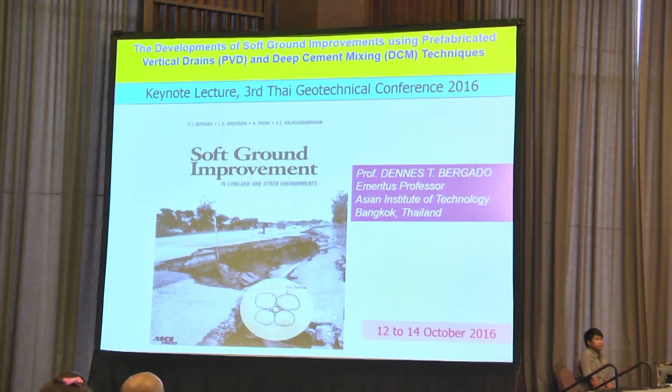And ever since I published my book in ASCE, Soft Ground Improvement, it's from my teaching notes and from the help of my graduate students. So we are actually lucky for AIT to be in the central plain of Thailand, where you have soft Bangkok clay.

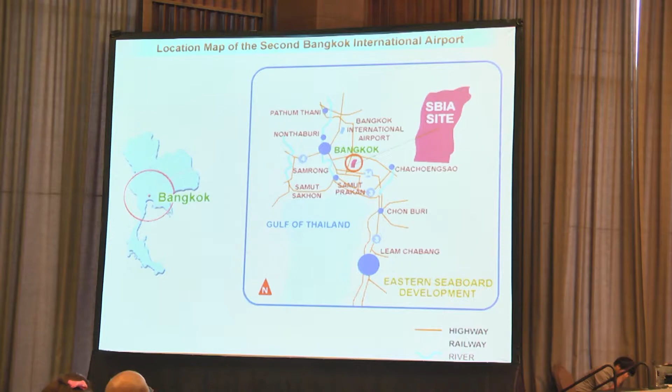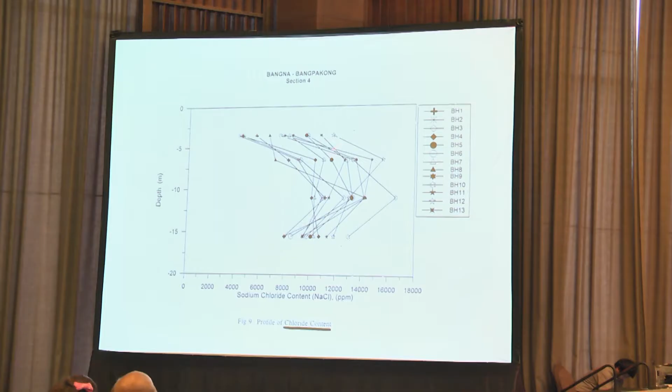And during the development of Suvarnabhumi Airport and expressways here, luckily they use soft ground improvement, which is more economical. And if you look at the soft Bangkok clay, it's quite normal, with water contents around 100, and undrained shear strength around 1 ton per square meter, or 10 kPa, and salt content, which is normal here, is not abnormal, and the organic content is also normal, about 4 to 5%.

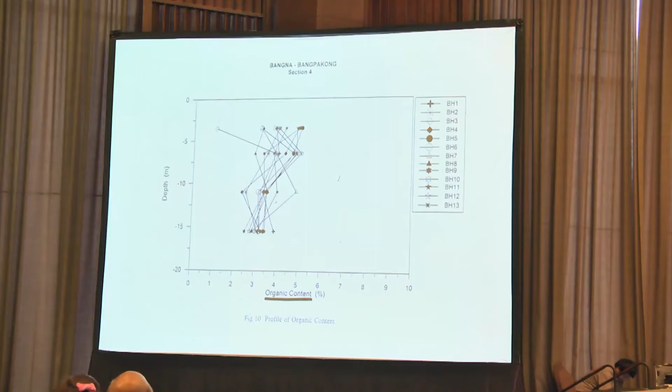This is good for the deep mixing method with cement. Our first project for the PVD was the Cobra Swamp, Nong Ngu Hao, and at that time it was just fish ponds, and bulldozers had problems leveling the ground, except when it is dry in the summertime. And what is the beauty of the soft Bangkok clay is that it's quite uniform.

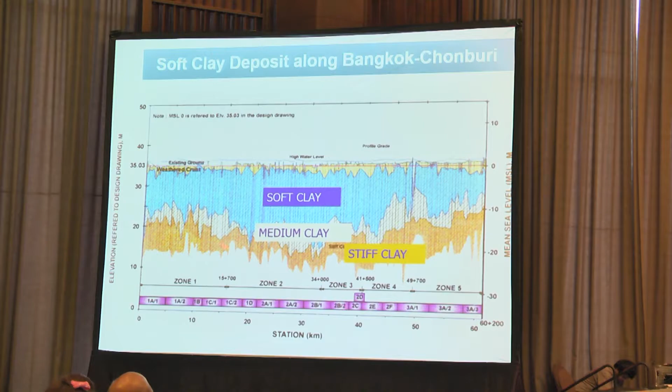You compare it with other clays, like in Vietnam, there's a lot of lenses of sand and silt, but this one is quite uniform, solid, soft clay, about 10 to 20 meters thick, continuous north-south and east-west, for 200 by 400 kilometers, a big deposit. And down below is the stiff clay, the medium clay, and the dense sand.

So to improve the soft clay, because there's a lot of voids, and these voids are occupied by water, we have to take out the water, because water is the enemy of the clay. If there's less water it's stronger, more water it's weaker, but the permeability is very small. So the objective is to reduce the voids.

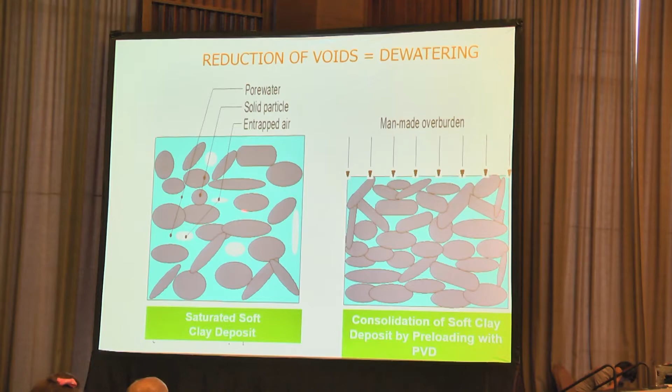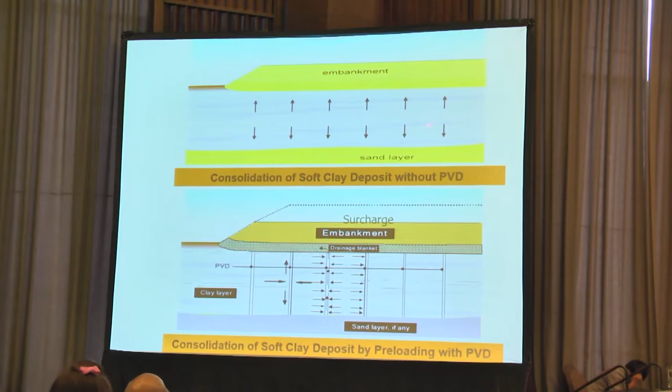From here, higher voids, to here, lower voids, you pre-compress. But you have to use some artificial drainage so that consolidation, which is normally vertical, takes time because permeability is very slow. So we have to put in artificial drainage, which is the prefabricated vertical drain. So what is PVD? It is artificial vertical drainage. The purpose is to shorten the drainage path so that consolidation will be faster.

And in order to squeeze out the pore water from the clay, you need a surcharge. Water will not flow up against gravity, it has to have a hydraulic gradient so that it will flow up. And we use horizontal drainage between vertical drains, which is higher than the vertical permeability, because of the sedimentation of the clay, horizontal permeability is higher than the vertical.

So we use that one. Then the vertical drain will take care of the vertical drainage, that's why it's called vertical drain. So surcharge embankment usually uses soil embankment.

However, they say, oh, this one takes time, about 1 year. No, time is money, you want faster than this. So now vacuum pressure is used to make it faster, you suck the water out, connect it to the vertical drain. And the latest one, before I retired, we found that applying heat combined with PVD, called thermo-PVD, is quite promising. So if you use vacuum, maybe you reduce time by 30 to 50%, but if you add heat, you will decrease it further.

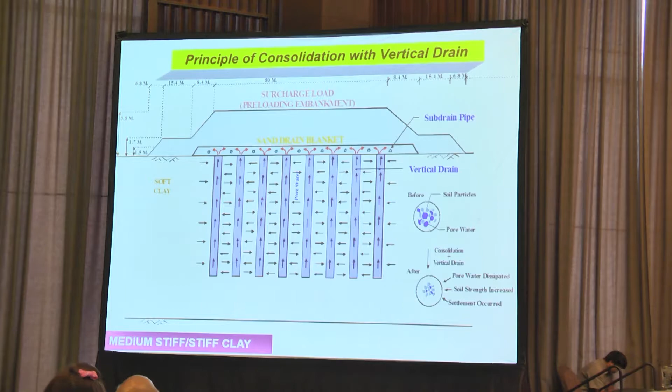So the principle is: you have the original ground, you put in the drain, put surcharge until it settles and compresses, or pre-compresses, then take out the extra surcharge. So step 1 is here, step 2, then step 3 here - you pre-compress already, compression. Then when you take out the excess surcharge, you have a rebound a little bit.

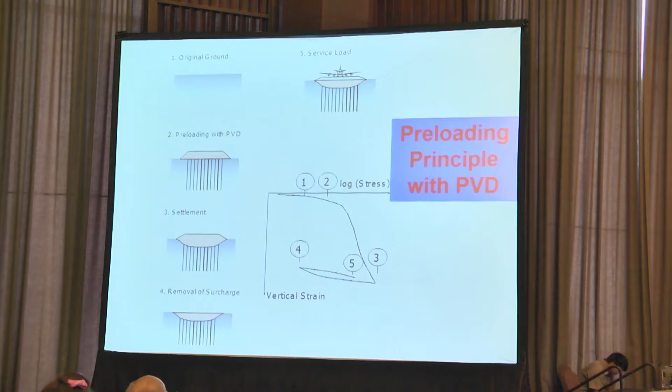When you use it for a runway or road, you remove compression - primary compression consolidation must be complete. The remaining part is only secondary compression.

If you don't use vertical drain, it might take a long time for compression - consolidation can take a very long time. But if you have vertical drain, you might finish in a year. Or if you have vacuum, less than that. And if you have heat, even less time.

But since you are building an embankment on soft ground, you have to have stage loading here, and that takes time. This one alone takes almost 6 months, another 6 months - so a year is already wasted if you don't use other methods.

These PVDs come from the original sand drains. However, for sand drains, sand is expensive here - the source is 100 kilometers away. The diameter is quite large, and the smear zone is twice the diameter. Imagine the smear zone here - I will show you later what's the problem.

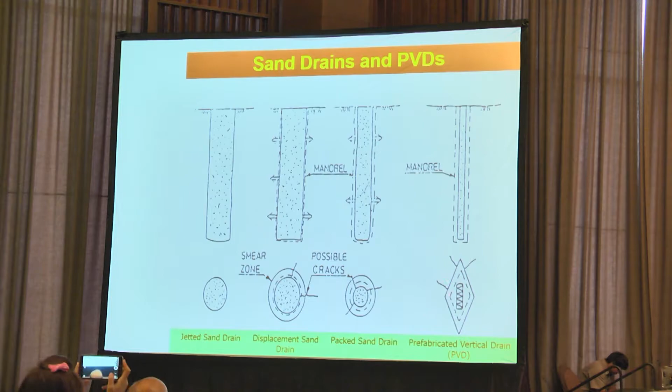But for PVD, it's just a very small cross section - the mandrel is also small cross section. So this is the PVD. It's made of polymer, geosynthetics.

It has a filter around the core. The filter allows water but prevents or minimizes soil particles from going into the channel of flow, which is the function of the core. The core is the channel of flow, prevents buckling, supports the filter. The filter allows pore water, minimizes fine particles, and reacts against horizontal pressures.

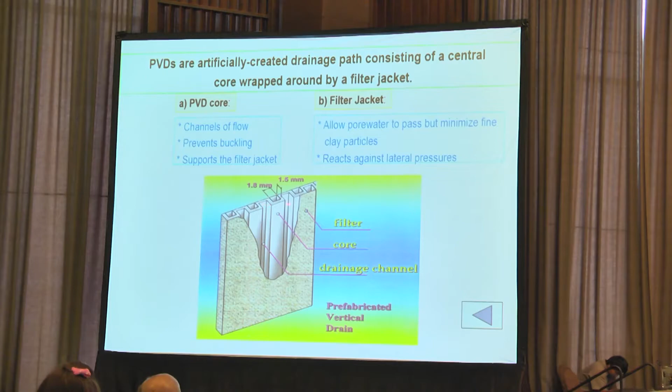So there are many types, but this design is quite okay - even though it's deformed or twisted, this size and shape of the core, and another one, is quite good to resist buckling and deformation.

So this PVD is supplied in rolls. This is a mandrel - push it down, you cut it. One location takes less than a minute, and you can install it. So you can install quite a lot in one day per machine.

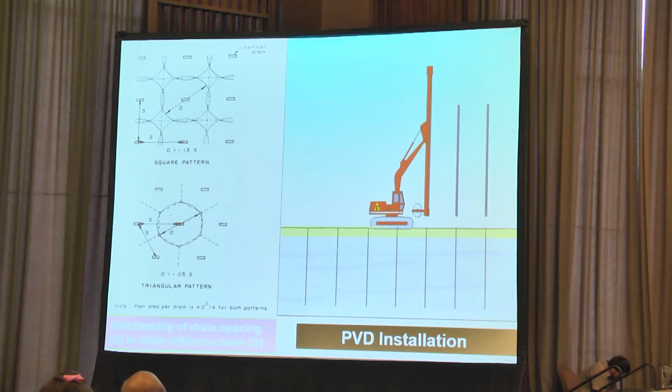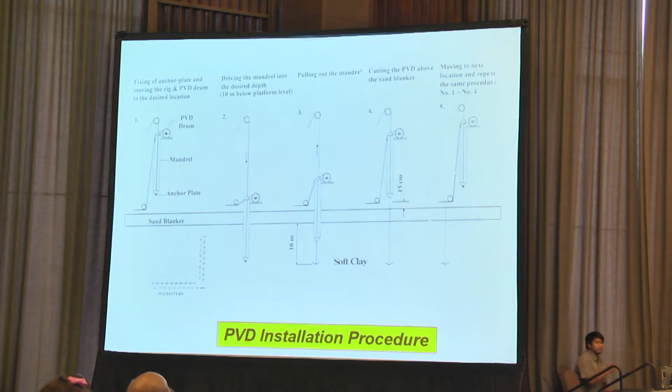The pattern is square or triangular. Since we have only very shallow thickness, we can use a modified backhoe to install it to around 10 meters. The plate is here - it serves as an anchor. When the mandrel is withdrawn, we cut it and finish one location in 50 seconds, less than a minute.

The problem is the installation. The installation here causes some smear or disturbed zone, and this disturbed zone permeability Ks is lower than the original horizontal permeability. The Kh over Ks ratio is a measure of the disturbance - this is a barrier to flow into the drain.

This is the object of research: how do you neutralize the effect of the smear zone, because it is a barrier to flow?

So one method is electro-osmosis. You put electric charge here, negative, positive. The ions flow from positive to negative, bringing the water molecules with it. But since this will be drying and this wetting, you reverse the flow every 24 hours.

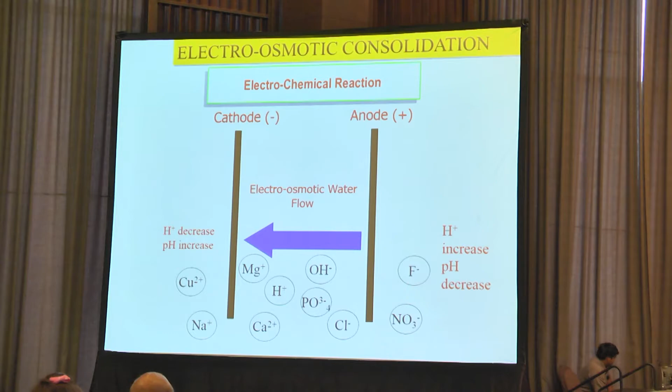This has been tested, but not so successfully - it is ongoing. This is quite sensitive to salt content and organic content.

Another one is vacuum. You drain, you either connect direct to the vacuum, or you have a membrane and you connect the vacuum at the embankment. Here we reduce the pore pressure without increasing total stress, so you don't have problems with stability or stage loading. It also increases the effective stress by reducing the pore pressure.

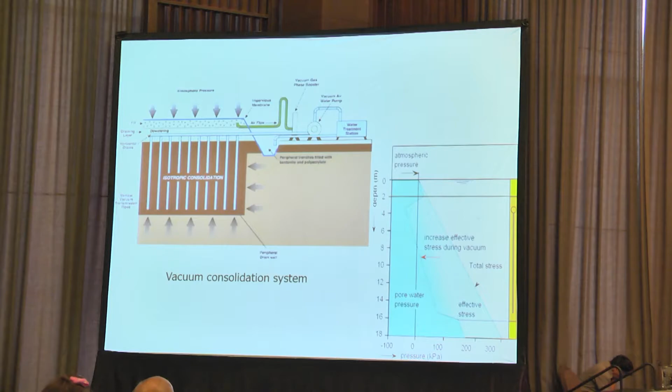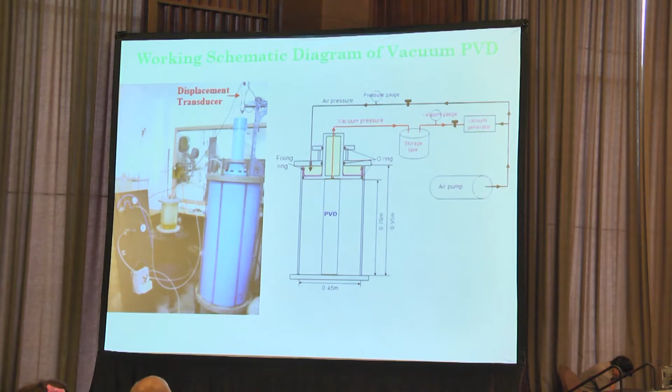In this case, the diagram shows we put the PVD in this big cylinder and apply vacuum. You have a vacuum generator and air pump. That's the diagram for the laboratory setup. You have reconstituted clay, PVD connected to vacuum, and we can also apply normal load here by the balloon or airbags.

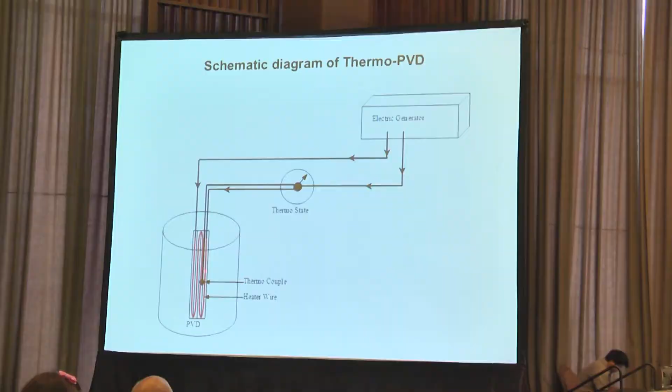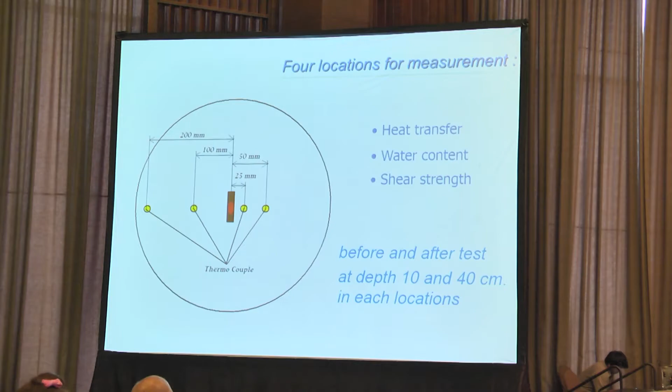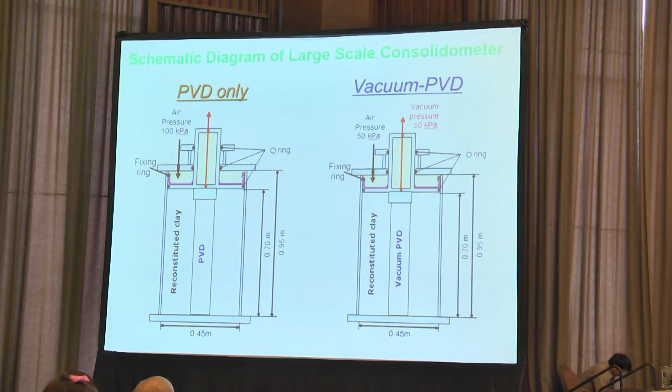It stabilized very quickly. So we did the test with PVD only, vacuum PVD, thermal PVD with special electric wires, and thermal vacuum PVD, combining thermal and vacuum.

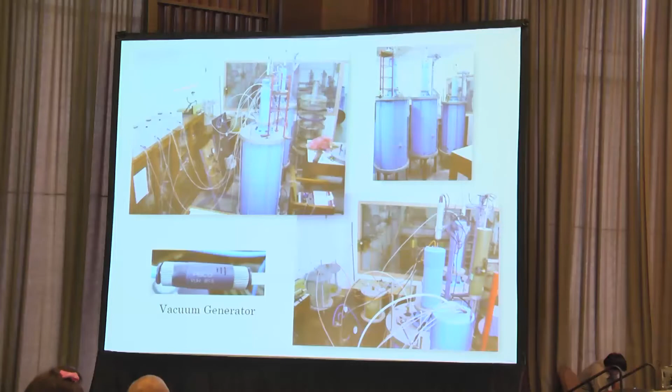We have this test before flooding in our lab. It was okay, but after flooding this would destroy it. Still, we have done our testing. This is the special wire we put inside the core for the heating.

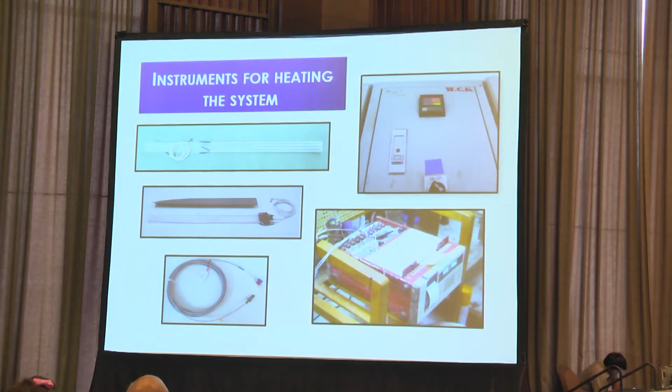I've heard from people in the States say, 'Professor Bergado, your paper was good, we use it to clean up the mine waste.' They use steam to heat the PVD, and you can also use fiber optics to heat inside the PVD.

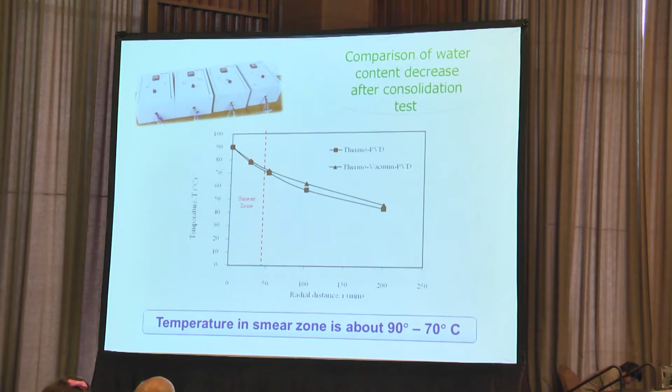If we look at the smear zone, the zone near the PVD is here, and this is the smear zone, which is twice the equivalent diameter of the mandrel. You can see the average temperature here around 80 degrees, and that would increase the permeability.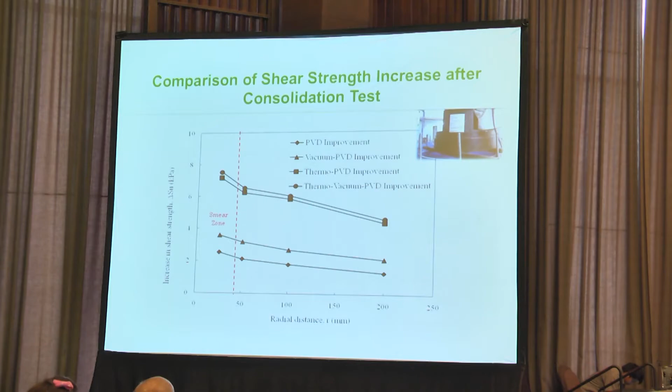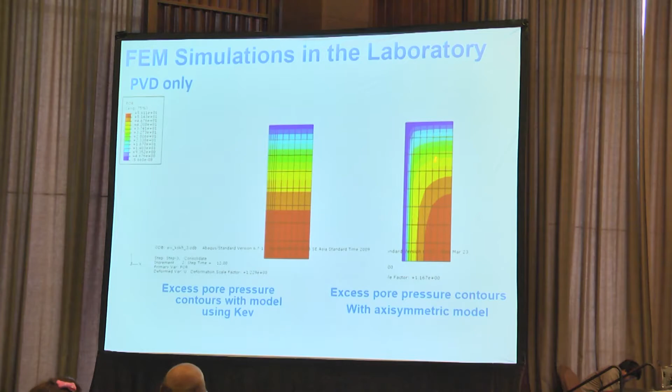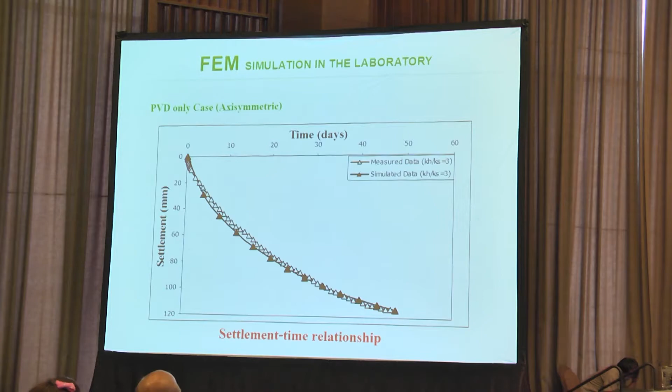We can also model this, and this is our modeling using equivalent vertical permeability with this equation, or the axisymmetric model, showing the flow of water as it consolidates. Both the axisymmetric and equivalent permeability approaches give quite good agreement between the simulated and measured data, so we can use that.

From here, we can also back calculate KH over KS and CH. These are very important flow parameters. KS is the permeability of the smear zone, KH is the original horizontal permeability, and CH is the horizontal coefficient of consolidation.

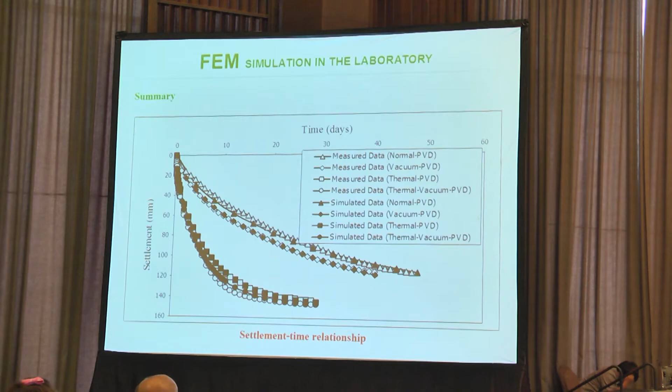From this method, we have normal PVD, vacuum PVD, thermal PVD, and thermal vacuum PVD, and this is our simulated and measured data for CH. For normal PVD, CH is small - this is reconstituted; in the field it will be around 5 meters squared per year. Then vacuum gives increasing values, thermal even more higher.

With thermal vacuum, KH over KS is reducing, almost equal to 1, so we almost erase the effect of the smear, with only 10% remaining when you combine vacuum and thermal. So KH over KS is a measure of the disturbance, and for us that's already a good indication of success. Although combining them is quite uneconomical, you can see the effect of vacuum and thermal is already registered - an increase of the horizontal coefficient of consolidation, which measures the rate of consolidation or drainage, and KH over KS measuring the effect of the smear or disturbed zone.

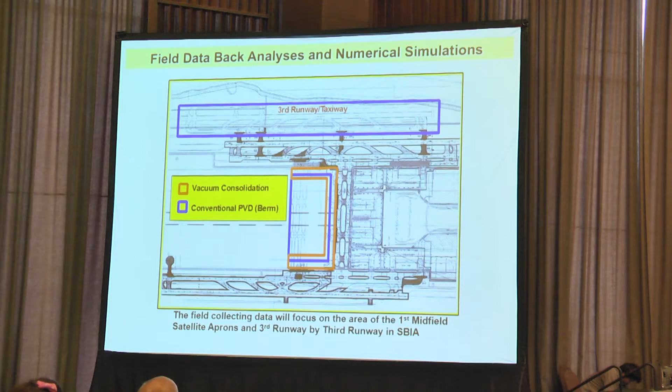Now we go to the field. This is at Suvarnabhumi Airport. They have both ordinary PVD and, in some areas, vacuum PVDs in the runways.

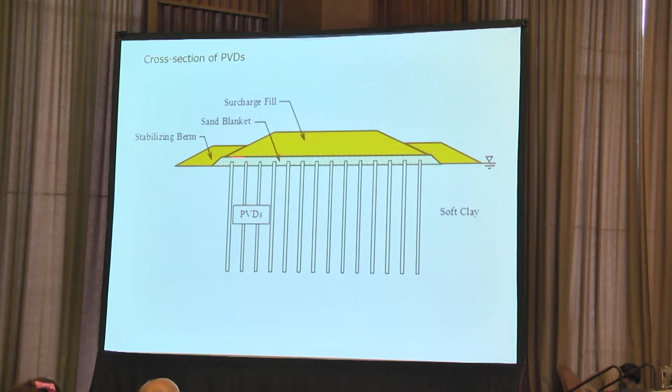This is for ordinary PVD. Of course, we have to use surcharge and a bench stabilizing berm to prevent sliding. For the CeTeau drain, they use direct connection from the drain to the vacuum. There are two types: one is the membrane method, which is not direct connection, but this one is a direct connection without membrane. Because of conventional PVD, you have to go more than 4 meters, so you want to exceed maximum past pressure. But for vacuum, you only need around 2.8.

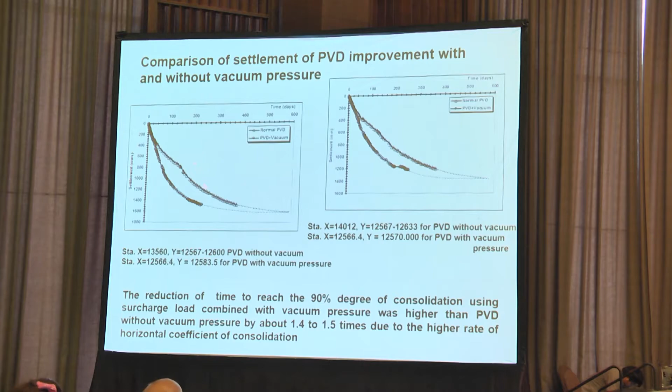You can see this is the ordinary PVD, with some stage loading. But this is the vacuum PVD here - it's faster than the ordinary PVD. Now we go to EIT.

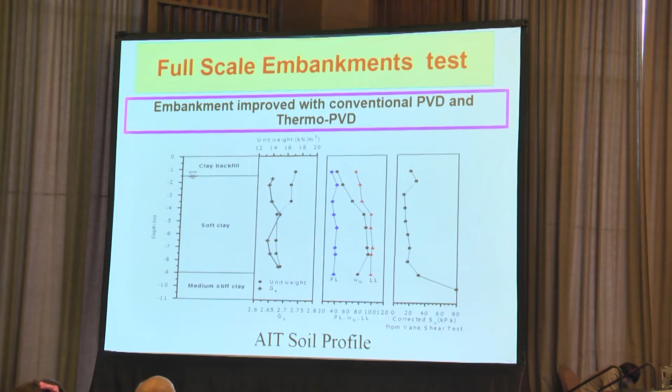At AIT, we have a stronger clay than in Bangkok. Our undrained strength here is 15 to 20. In Bangkok, we have only 10. We use this one to test the thermal PVD. We only instrument the middle here - out of 9 PVD, we only instrument the middle, because that is our principal objective: how to put heat.

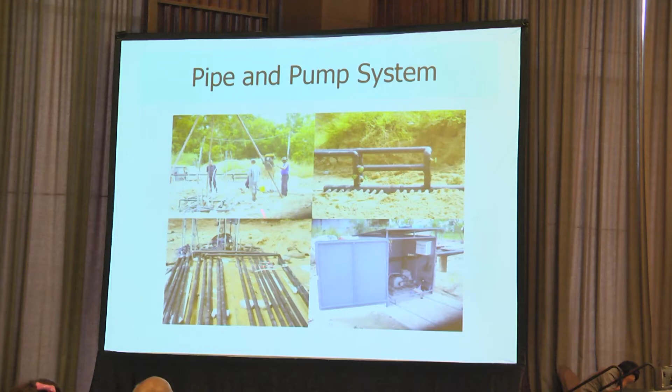We have a heat exchanger for the room or building from Suvarnabhumi Airport, using PEX tube. You put hot water here and it will transfer heat. So we use that one. And we have a solar pump here, and insulation for the water, so hot water goes inside.

And we test two cases, one without heat and one with heat, same height. We have water storage - in the daytime we use solar cell, nighttime we use electric heater, and circulate water. It has to be circulated, if not the temperature reduces, so we circulate 24 hours. You can see the settlement without heat, and with heat it's quite fast, at 3 meters, at 6 meters, at the surface.

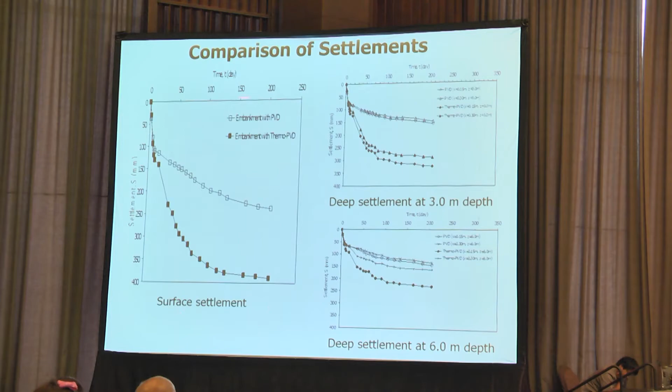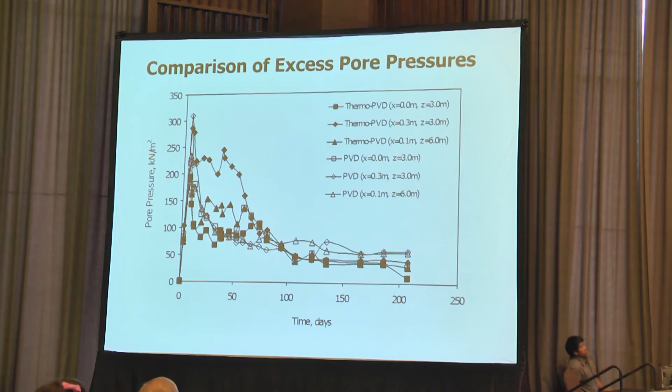Excess pore pressure occurs because water expands more than the clay structure. So there's excess pore pressure near the vertical drain, but then the vertical drain will take it out. If you don't have a vertical drain, this will weaken the soil, the clay, when you heat it. But if you drain it out, it makes it stronger.

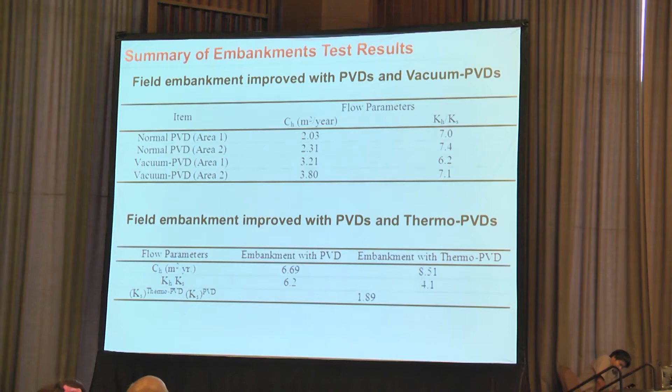You can see the heat transfer in the beginning, after 20 days - it's quite quick transfer of heat from the location of the PVD with heat. And the Ch value here - normal, vacuum, and here is thermal PVD. You can see the Ch value increase like in the lab. And the Kh over Ks ratio, some of them are, but this one is more realistic, because in the field you cannot control it - it's an actual field test.

What is the advantage in Thailand is cheap land, labor, and material. You can do field full-scale tests, and you don't need a centrifuge. A centrifuge is for when you have a built-up city where you cannot do a field test - centrifuge is good, but for industrialized countries, then they use a centrifuge.

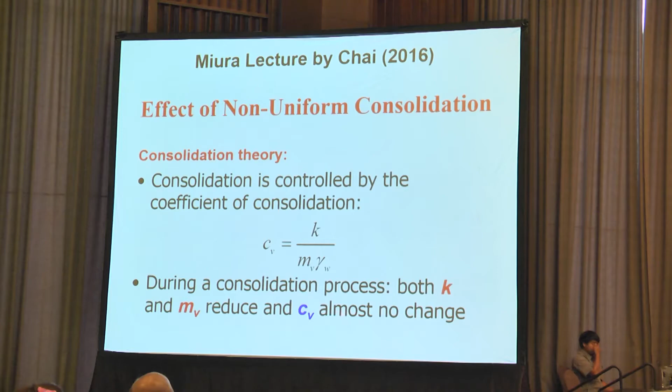But Chai, my student in Japan, my only student from China, a brilliant doctoral student, found that there is an effect of non-uniform consolidation. CH or CV is a function of KH and MV. When KH and MV reduce, the CV or CH remains almost constant.

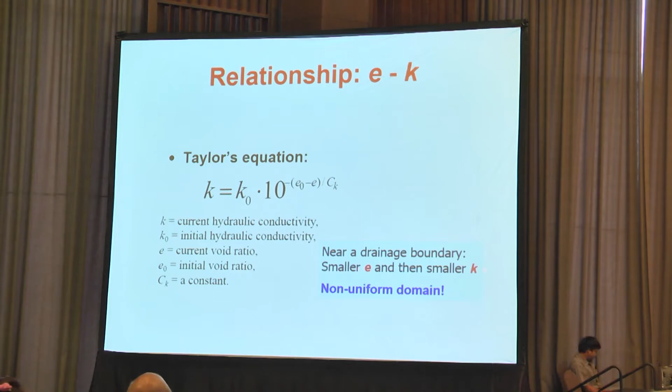So these two here with different permeabilities are non-uniform. There is an effect of the non-uniformity on the excess pore pressure, because permeability is a function of the void ratio. So the more compression, the smaller the void ratio, and permeability becomes smaller. So smaller e and smaller k, smaller void ratio, smaller permeability - that is the non-uniform domain.

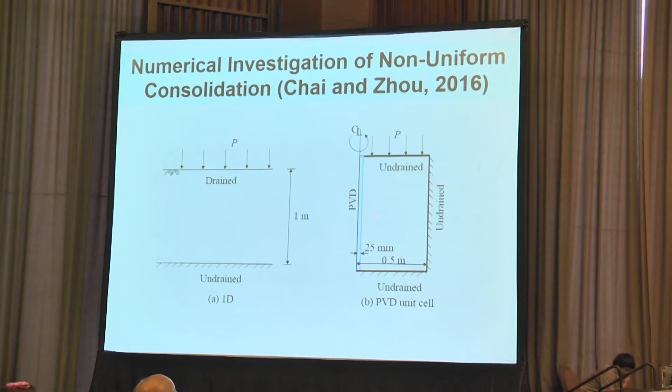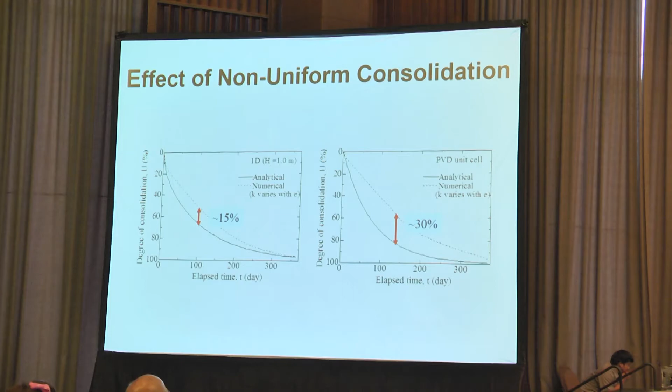For example, you compare one-dimensional loading drainage, here impervious, to the drain, which is axisymmetric - this is a PVD unit cell. These are the parameters. CH is constant, ideal condition, no smear, no well resistance, and you have this result. For the PVD unit cell, compared with analytical and numerical, and this is for one-dimensional - you see the difference. This is due to the effect of non-uniform consolidation.

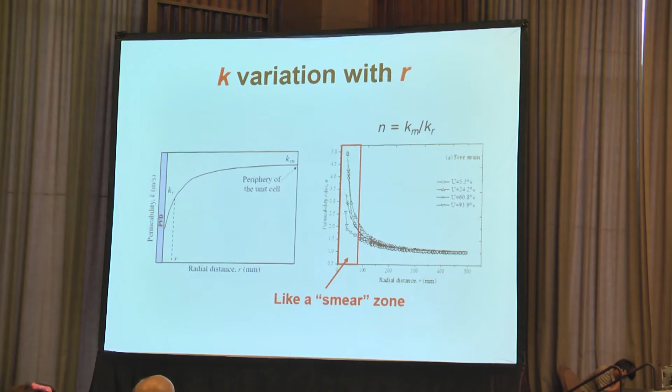Now we take the variation of permeability with the radius, free strain, equal strain, and radius - the drain is here, the void ratio smaller because this is draining, then away from the drain. Or if you have the PVD here, permeability near the drain versus permeability far from the drain - this is the smear zone. So Kr is less than Km. And if you take the ratio Km over Kr, this is the smear zone - that is the effect of disturbance due to the installation of PVD.

For ideal conditions, you should have this degree of consolidation with time, but the real one is here because of the smear. If you back-calculate, KH over KS is 2.4.

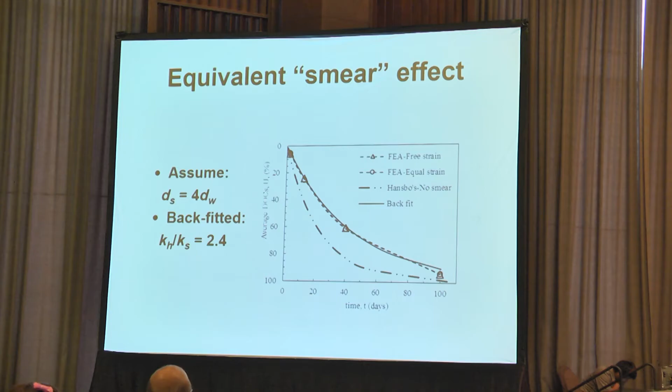So without considering smear, you don't get the actual result of the test because there is a smear zone. This smear zone study was done by my student in 2011, confirming there is smear. Cholachat, also my previous student, now working with Professor Indraratna in Australia, found that water content near the PVD is lower, which is the cause of smear.

However, Professor Chai says there are two kinds of smear zone: one is mechanical, one is by non-uniform consolidation. One is direct measurement, the other is non-uniform consolidation, and this is the subject of ongoing research. There are so many doctoral degrees obtained by studying the smear zone.

Here is another way of looking at it. There are two components of the smear zone: one is mechanical, and the other is non-uniform. This paper has been accepted in Geotechnical.

For example, the back-fitted field KH over KS by Chai and Miura is 10. Ariake clay measured KH over KS is 5. If you account for non-uniform consolidation, 2.4 multiplied by 5 gives you 12, which is almost the same as 10. That is one confirmation of why you get a higher back-analyzed KH over KS. That is still under research.

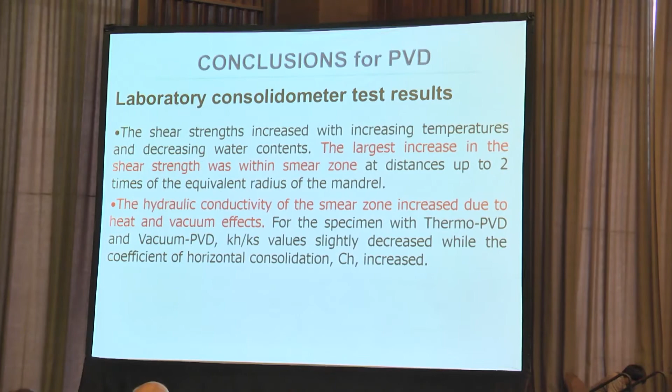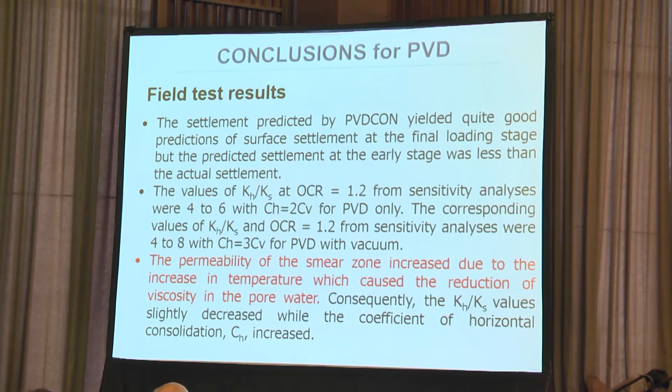So this is the conclusion for PVD. Sorry, I have two topics, so we are still on PVD. There is the largest increase in shear strength within the smear zone, and the hydraulic conductivity of the smear zone increases due to heat and vacuum, giving faster consolidation. Another point for the field: the permeability of the smear zone increases due to the increase in temperature, caused by the reduction of viscosity of the pore water.

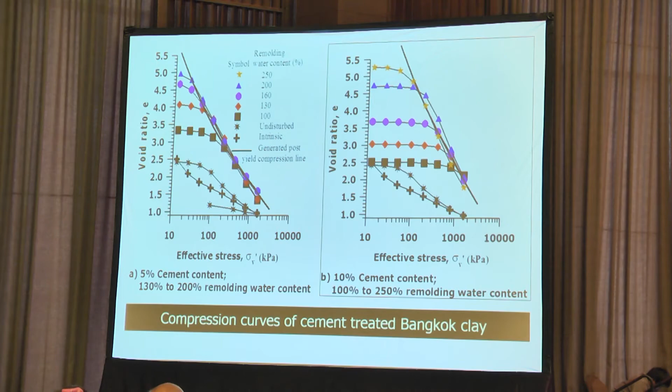This is for 5% cement and 10% cement. When you increase the water content, the yield stress decreases, and it forms into one line. So we have the line of yield stress, and here is the void ratio.

When we have that, we can predict the compressibility using void ratio and the line of yield stress. We can also predict the unconfined compression strength as a function of after-curing void ratio and cement content. So we can now predict strength and compressibility rather than relying on trial and error using this technique.

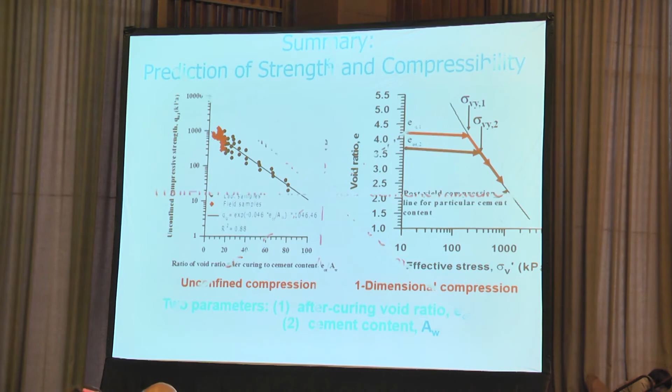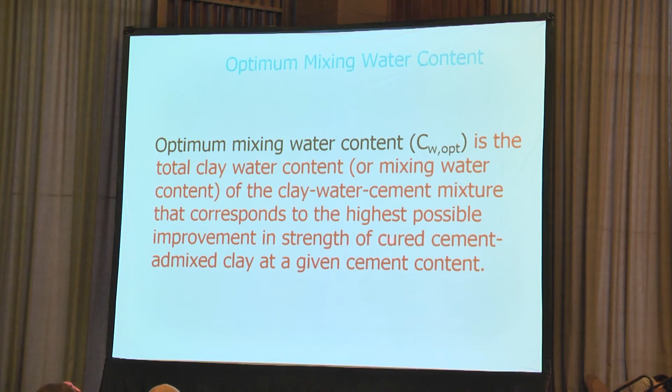Second, there is the optimum mixing water content, which is the total clay water content mixed in the clay over the cement content. The optimum is where it gives you the highest possible improvement in strength, because when you have untreated clay, you have voids with some air besides the water, and at high water content there is good mixing.

At lower water content during mixing, some cement remains unmixed, so there is inefficiency of mixing. At high water content, mixing is efficient. We found that this efficient or optimum mixing water content is close to the liquid limit.

So if your ground water content is less than the liquid limit, you can see contractors add water first to the ground to increase the water content up to the liquid limit, and then start mixing, so that there is better mixing of the cement with the clay. So we have two findings: you can predict strength and compressibility instead of trial and error, and the optimum mixing water content should be close to the liquid limit.

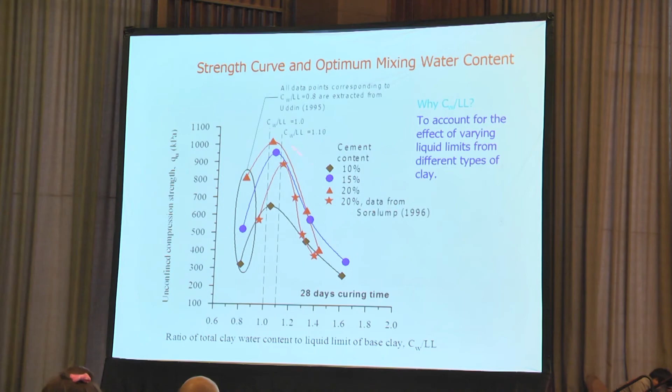Of course, if your ground water content is already close to the liquid limit, you don't need to add more water. But at AIT, we have only 80%, and the liquid limit is 100%, so we have to add more water for efficient mixing.

Okay, there's a new topic here: the effect of curing stress.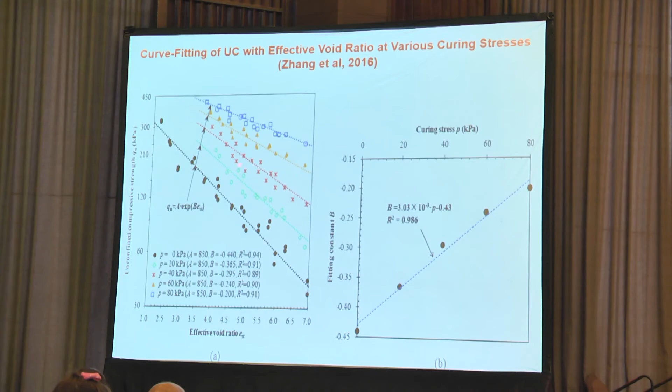During curing, if you apply stress, the voids are lower. See, this is a semi-log straight line. Here, higher stress, here lower stress. So higher stress gives you higher unconfined compression, and this is due to...

...stress during curing. Our tests usually don't put stress during curing, so the improvement of strength due to no stress during curing is this. But if you apply stress, you have more increase of strength. This one is 80 kPa, this one is 0 kPa. So if you apply stress during curing, you have more strength.

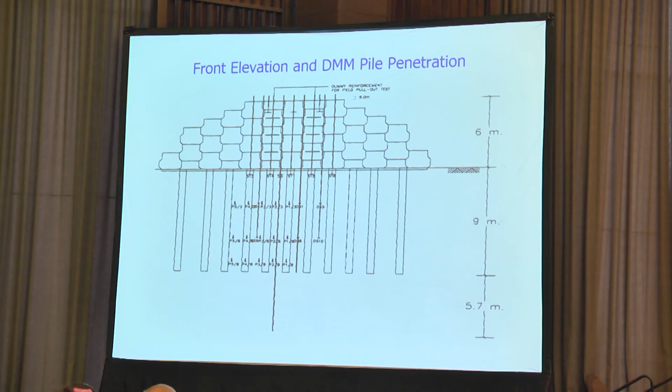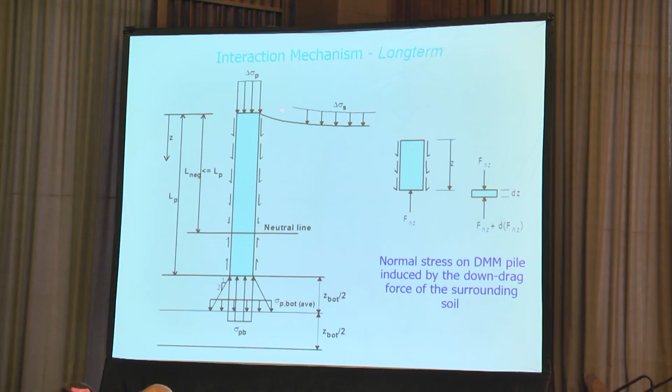Looking at this, we have full-scale tests using deep mixing. You can see that the interaction is neither equal strain nor equal stress. I just show you that we derive the consolidation equation because of that, and we can see this is due to equal stress, due to equal strain.

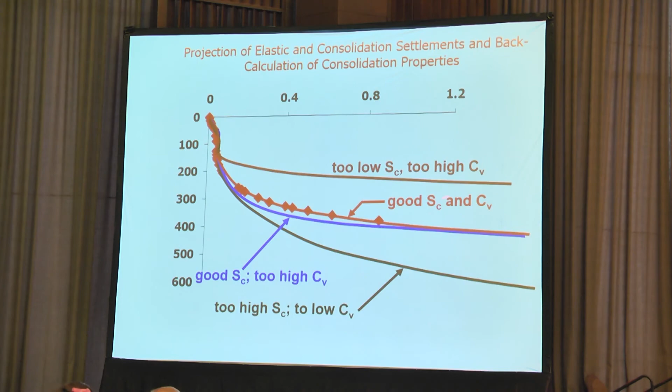To cut short time, we can simulate this from the field test. So we need to go, this is our objective, and if we have the right parameters, we can find this.

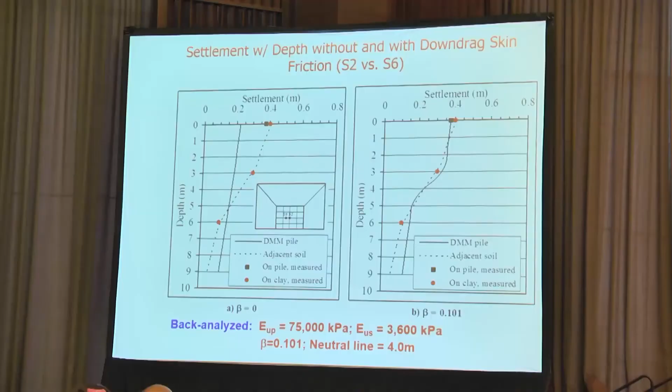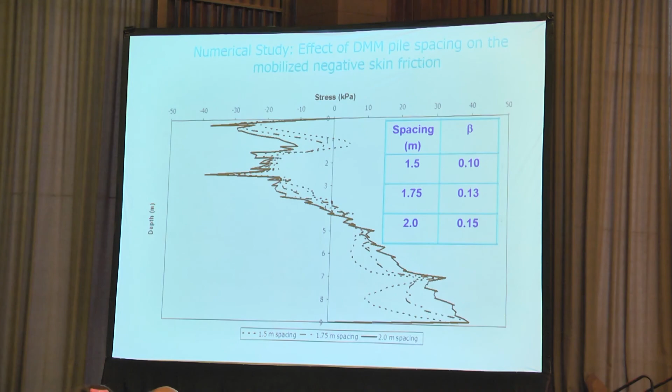You can also back analyze the modulus here to get the negative skin friction beta. If we use that, we can get spacing of the pile with beta, increasing spacing with increasing beta for negative skin friction. We can suggest using deep mixing as an approach to the bridge, as an alternative to concrete precast pile.

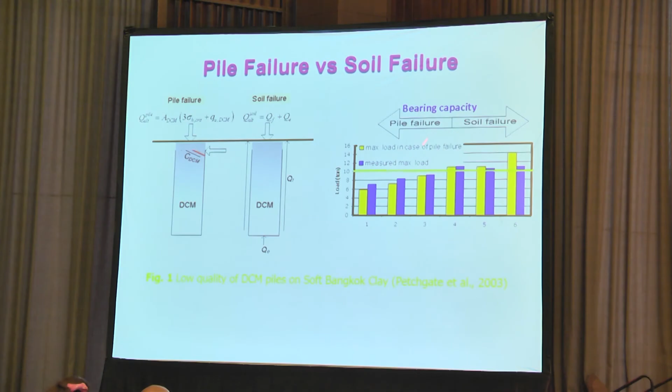But the problem with deep mixing is low strength because there is failure. We call it pile failure - this one is soil failure. If it is pile failure, the measured bearing capacity for pile failure is lower than for soil failure.

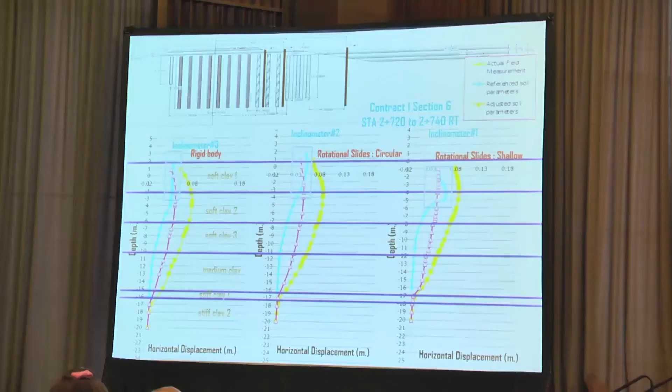And you will have this kind of failure, or this kind of failure, at the Sonapum Canal. Because of low capacity, they even added more piles here, but there is lateral shear failure. So what we do is put some insert here, called stiffened deep mixing.

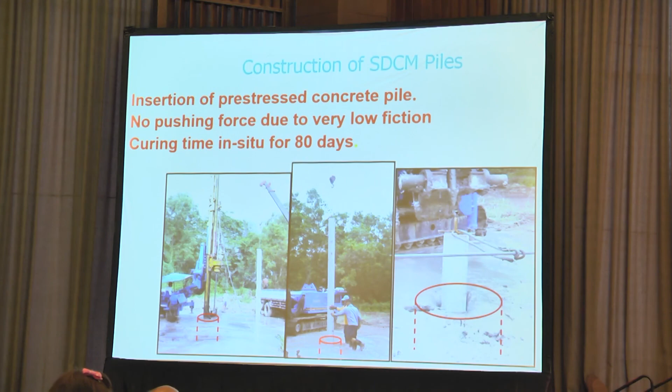Some people use concrete piles, some people use steel - steel is more expensive. After mixing installation, you put the pile and hang it there until 80 days. We measure the effect of the length and diameter of the insert.

The testing is full scale. See, for vertical it is a function of the length - this is 6 meter, 4 meter. And this one is without insert, you can see the difference. This is deep cement only, this is with insert, or stiffened deep mixing.

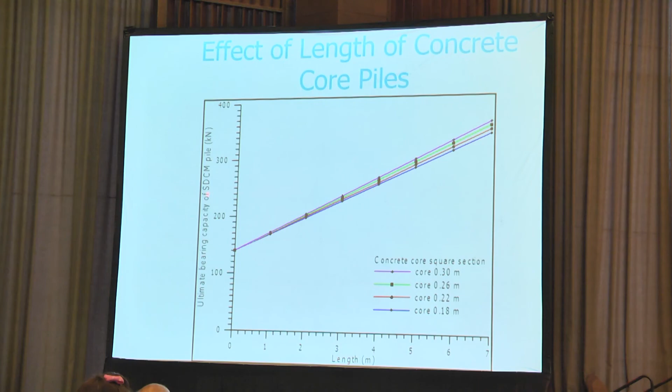We also did the pull out test, and we can now simulate it. The effect is that the length is more sensitive - the ultimate bearing is sensitive to the length of the insert. Now the load transfer is more uniform than without insert, and you can see the failure modes.

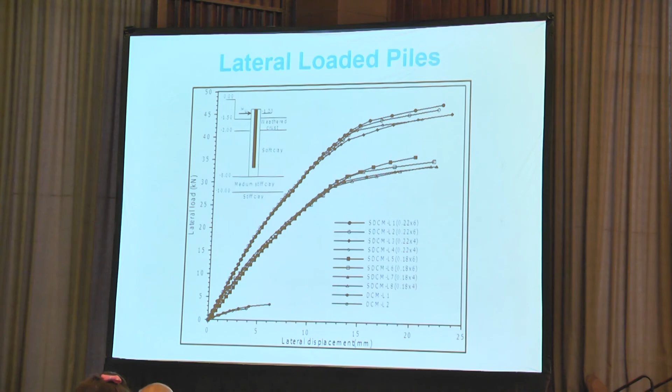For lateral load tests, we test horizontally - without insert is here. But with insert, this is now sensitive to the cross-section. This is 22 by 22, 18 by 18. It's sensitive to cross-section rather than the length.

So this is the effect - the cross-section has higher ultimate lateral capacity than the length. The length, if lower, affects it, but when it is more than 4 meters, it has no more effect.

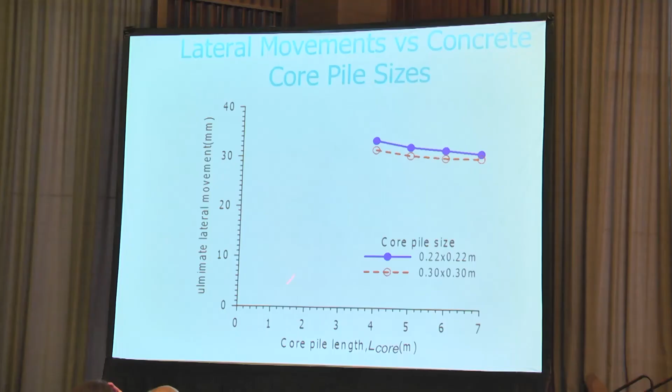So we have the field test, SDCM, DCM, and compare the settlement. SDCM pile and surrounding ground compared to DCM - DCM has more lateral movement. But with larger cross-section, like 30 by 30, 22 by 22, you can see the amount of lateral movement. So that's all we have - these are the parameters back calculated.

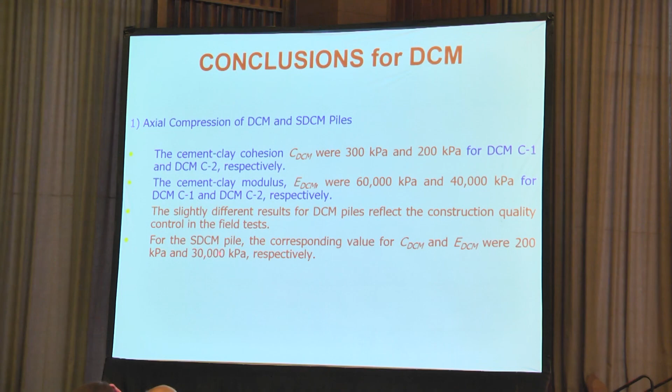With DCM only, construction quality is variable because of the mixing procedure. But to solve that problem, we use an insert called SDCM and increase the capacity, both vertical and horizontal.

Maximum load develops at the top and decreases to a depth of 4 meters. Therefore, the DCM failure occurs at the top - no wonder there is pile failure. But for SDCM, it is transferred down due to the presence of the inserted pile.

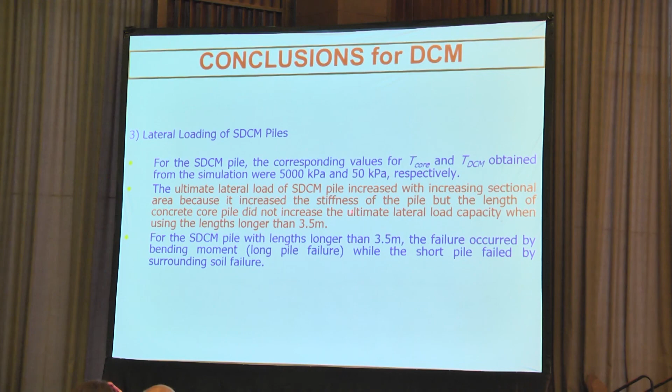The ultimate lateral load increases with increasing cross-section, while for vertical, capacity increases with length. See here, the longer pile can reduce vertical displacement, and the bigger sectional area reduces lateral movements. So thank you very much for your attention.

Thank you very much for your excellent presentation of the PVD and also cement column. I'm sure all of you can see all the works that he has done and the excellent work that contributed to our society. Thank you very much.